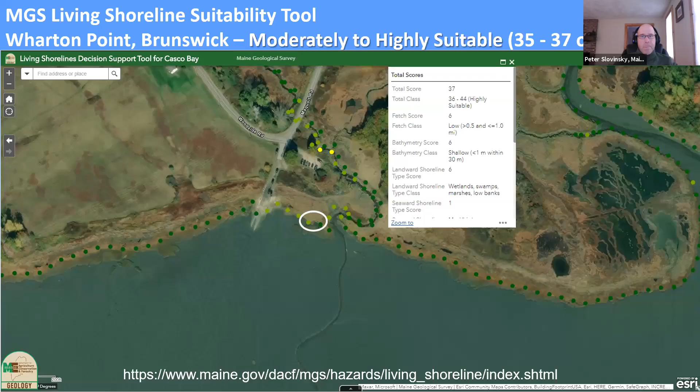So I mentioned our MGS Living Shoreline Suitability tool. This is a tool that we've developed for Casco Bay only at this point, which looks at a variety of different factors that influence whether a site is suitable or not for a potential living shoreline project. And we basically scored all of these; every 150 feet, there's a point. You can see these points all along the coastline here. And those points are a summation of a variety of different characteristics that we assign weighted scores to. So our highest score is highly suitable with a range of 36 to 44.

So Wharton Point came in at moderately to highly suitable with scores of 35 to 37 along the project site out of 44. This is what the site actually looks like. It's a small 50-foot segment of a larger eroding coastal wetland. There is a log that's washed into the marsh. I'll explain to you why we chose to have this where the log is. So we're only looking at about a 50-foot treatment on a relatively large marsh edge.

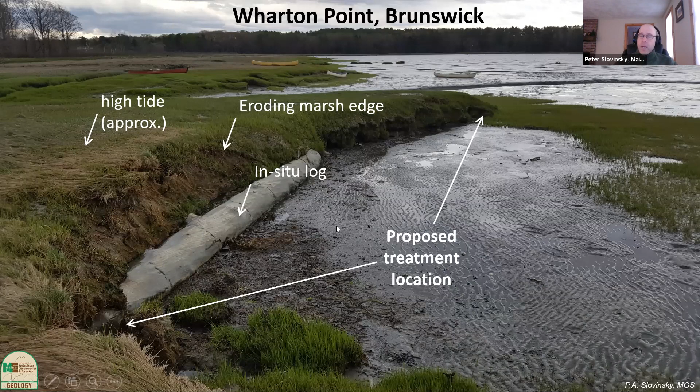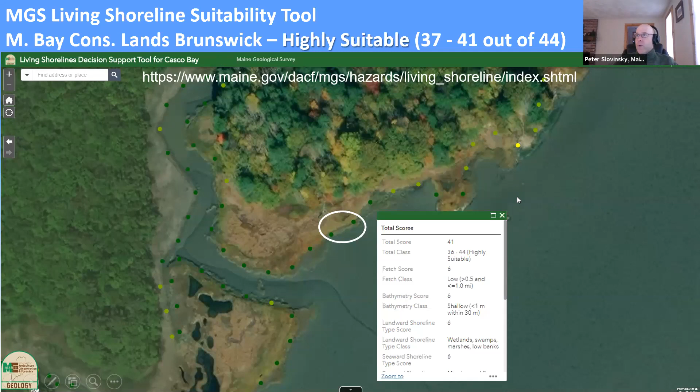Our second site, Maquoit Bay Conservation Lands in Brunswick, scored highly suitable with a score of 37 to 41 out of 44. So it's in that higher range even than Wharton Point. It is on the end of about a 20-minute hike or a quick airboat ride from Wharton Point. And this is what that site looks like. Again, we had an eroding marsh edge. You can see these slump blocks that have slumped down, which is representative of a lot of fringe marshes in Casco Bay, and a 50-foot section along a much larger stretch of eroding salt marsh.

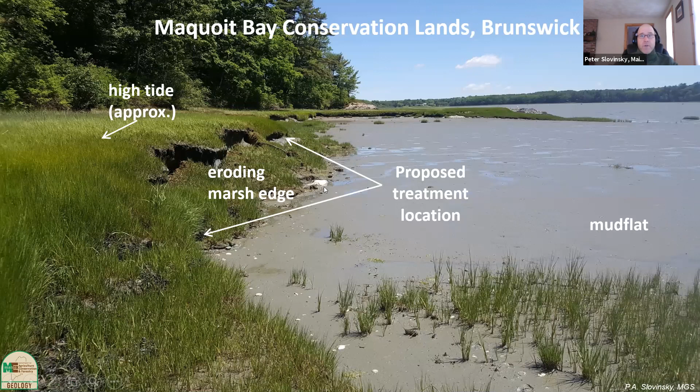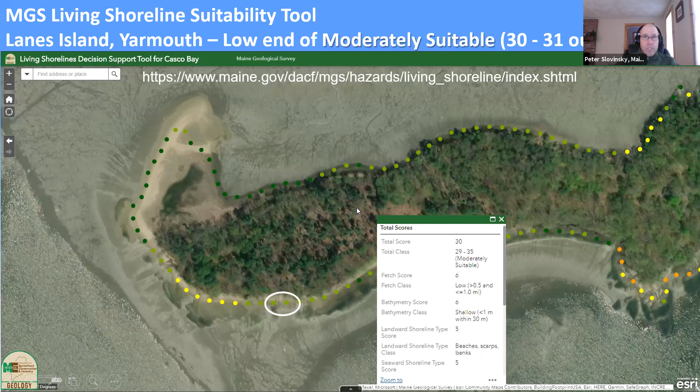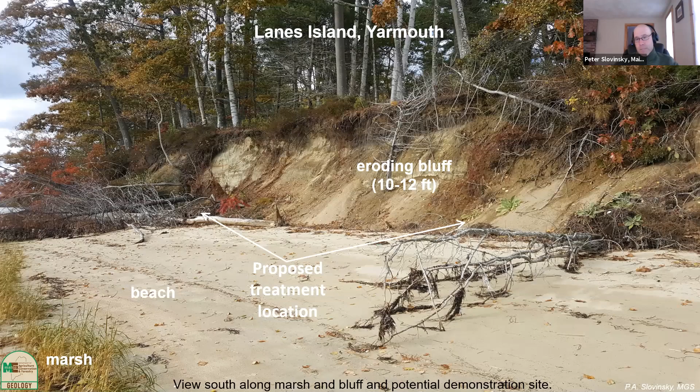But this is a test site we wanted to test for a coastal bluff. It's owned by a project partner. And it's on the low end of that moderately suitable scale. This is kind of what it looks like. There's a long stretch of eroding coastal bluff, about 10 to 12 feet in height, and lots of down trees. So we had trees on site that we wanted to use.

Fill it with oyster shell and put it out to create a little kind of sill or a little breakwater at the edge of a marsh to help break up waves or slow down erosion. This is something that immediately raised concerns with the regulatory community because these plastics break down very, very quickly. These bags tear very quickly, and then these plastics become smaller pieces of plastics in our marine environment. So that's something we had to address right away. We couldn't just go out and throw these bags out there.

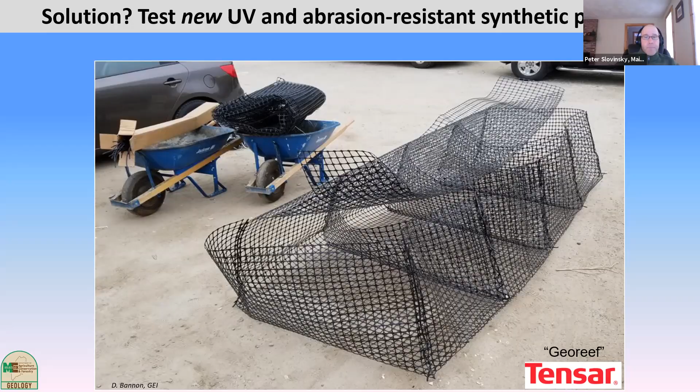So one of our challenges was COVID, of course, hit. And we had to come up with a way to socially distance, but also fill close to 400 bags with oyster shell.

So we came up with a bagging system at Brunswick Public Works with a bunch of volunteers, where we built these bagging stations. A little tiny tractor was used to put oyster shell into these. You could sort out dirt and stuff off the top of this, fill each tube, and then there's a bag underneath. And then we set up sewing stations, and everybody had their own station, and we sewed these bags by hand. It took a lot of time, but we did 400 bags in about 3.5 days.

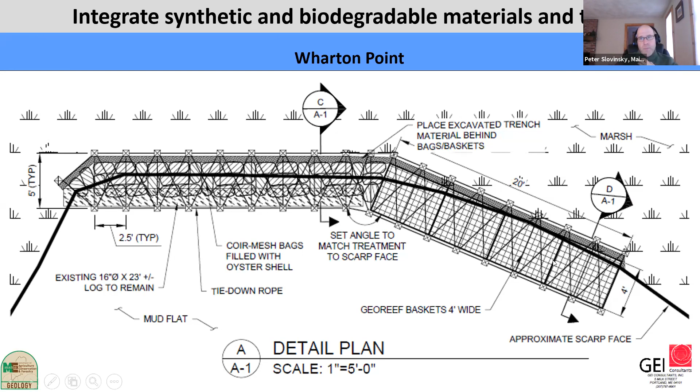So again, our goals are to look at these synthetic and biodegradable mixes on small treatments. So this is our design that our engineer at GEI came up with for Wharton Point. On the left-hand side is where that log is located. This would be where the textile bags that are filled with oyster shell would be placed and staked. And to the right of that is where the georeefs would be placed and filled with oyster shell.

For the Maquoit Bay Conservation Land Site, we didn't have any logs there, but we had trees that we brought into the site. And what we wanted to do, again, was test a synthetic, this is on your left-hand side, the georeefs, versus a biodegradable product, but we integrated what we call tree runners. These are 10 to 12 foot logs that we put perpendicular to the shoreline that are meant to break up ice as those ice rafts come in towards the installation.

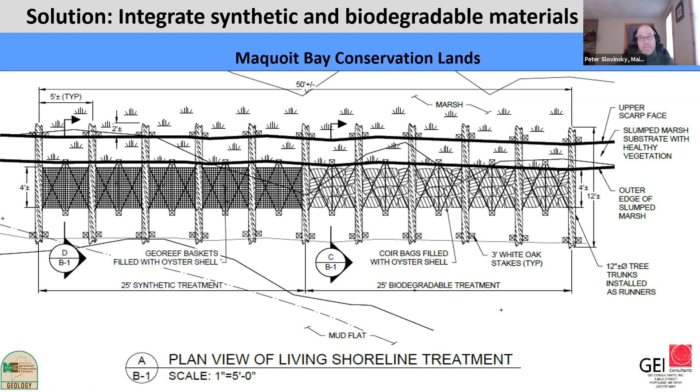So this is what it looked like when we were integrating the trees into Wharton Point and Maquoit Bay Conservation Lands. On the left is Wharton Point, and the right is MBCL. At MBCL, we had to float these logs in at high tide, lash them at the top, and then let them fall, and then lash them in at the bottom. And all this was done with volunteers at both sites.

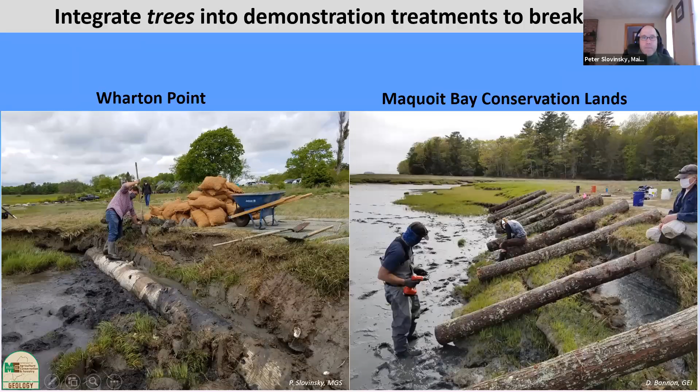One of the challenges we encountered, this was an interesting one, was what I'll call a, quote, dirty oyster shell. We actually didn't have enough oyster shell in Maine at the time. We don't have a recycling program in Maine. We do now. But we needed a lot of oyster shell, about 40 cubic yards. So we worked with the University of New Hampshire to get oyster shell from one of their facilities where they have aged oyster shell. They have a recycling program where restaurants literally donate their shell, and then that shell is aged for a period of time, in this case, about 3 years, on an organic farm.

So this is what that shell looked like. What was interesting was this shell was brought to Wharton Point. It was actually aged at the town of Brunswick for another year. And then we brought it to Wharton Point and dumped it. The shellfishermen started just digging around in there, and they saw organics, they saw plastic forks. So immediately this created kind of like this red flag of, you're going to be putting that into our Maquoit Bay. So we had to come up with a solution on the fly to deal with that problem. And this is something that other folks who might be looking to use shell might encounter and have to come up with a solution for.

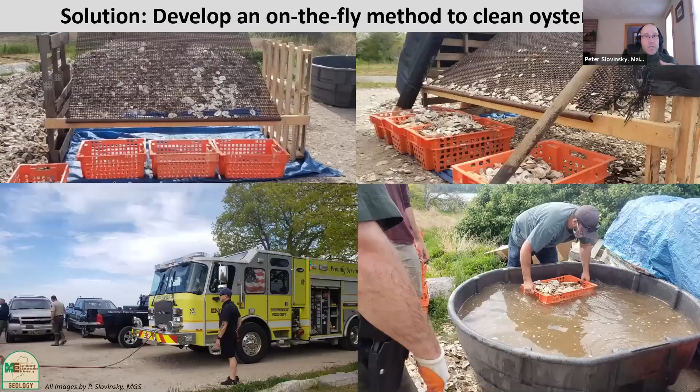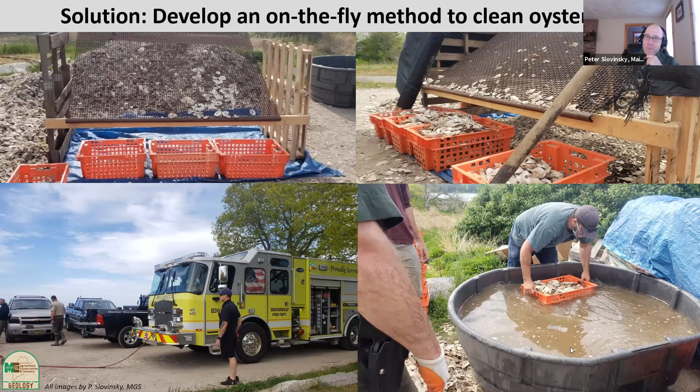So working with Brunswick and IFNW, we developed this screening system on site where you dump the shell through the screen, get out all the bad stuff underneath, pick out all the plastic, and it goes into these baskets. The fire department came, filled up a big tub, and then we dipped each one to rinse it off. Okay, so that's how we created clean shell on site.

Another challenge was doing all this work with volunteers while trying to work around tides. So we had to bring in logs at high tide. A volunteer gentleman from Smith Boatyard actually donated his barge and brought the logs over by barge at high tide. We put them in place at high tide. And then we worked with the town of Brunswick's airboat to be able to shuttle materials back and forth to the MBCL site throughout all the tides, so we could actually work during low tide. Otherwise, we'd have to be hiking 20 minutes on a trail with all this stuff. It just wouldn't have made sense. So this is what the installations kind of look like.

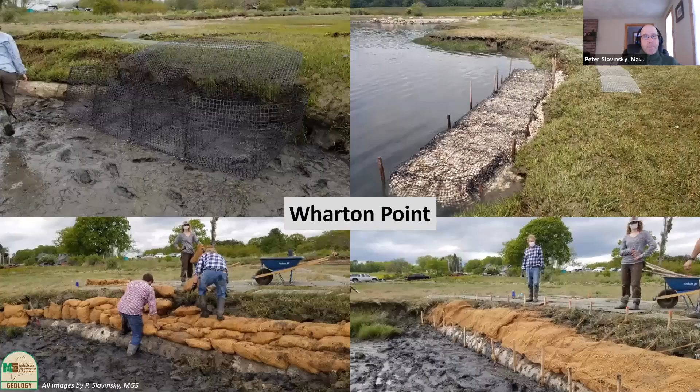We assembled the georeef, filled it with shell, and staked it in place. It creates this beautiful rectangular reef-like material. It's highly, highly resistant. It actually will tear up your hands if you're not wearing gloves. And this is the placement of the biodegradable bags at the Wharton Point site, and they're staked in place and covered with some coir fabric.

At Maquoit Bay Conservation Lands, again, we floated the logs in at high tide and lashed them at the top. Then we put the georeefs underneath. They do not want to be in a trapezoidal shape or a triangular shape. They want to be in that rectangular shape. That was very hard to do. We filled it with shell and then put the bags in place as well.

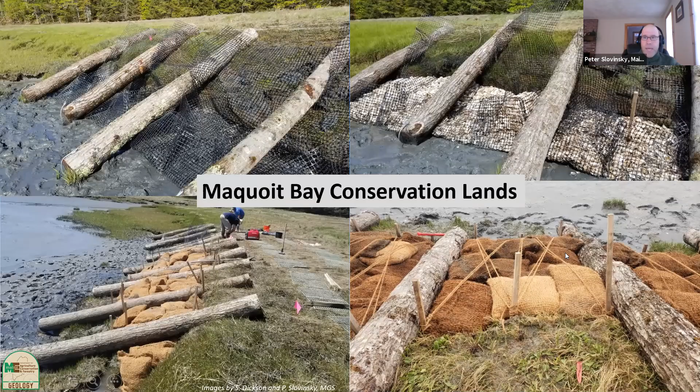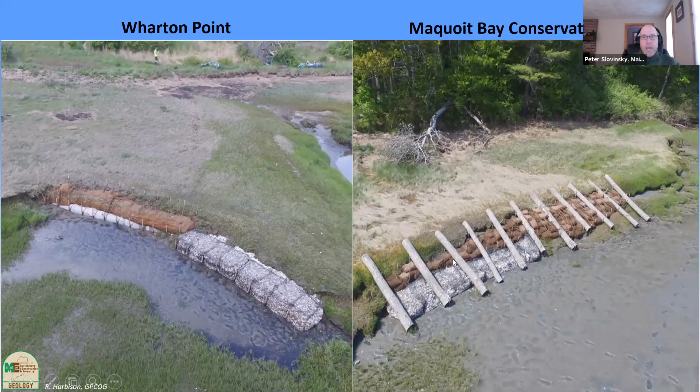We wanted to see if we could slow down that erosion, but still allow for sediment to go out to the intertidal zone. Working on an island is not an inexpensive proposition, and you can't necessarily do it with volunteers. We had to hire contractors to do this work. The installation here was very different. We call this a stepped crib approach.

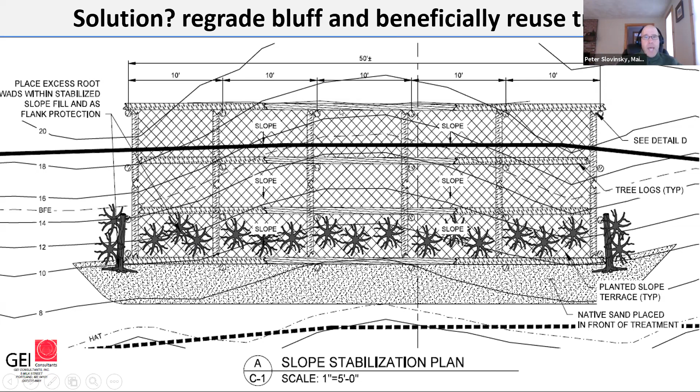So basically, fallen trees were beneficially reused to create 1, 2, 3 steps, and then root balls, the ends of the cut trees, were put in that first step along with on the sides to help mitigate for end effect erosion. And then all the material from regrading the bluff was placed in these steps and in front.

This is kind of what this looks like from a plan view. You can see each step created is then planted with native vegetation, less salt tolerant as you go up the slope. And then excess material is placed at the toe to create sacrificial material, and then in each step. The idea is if a step fails, that material will then be released to the intertidal zone.

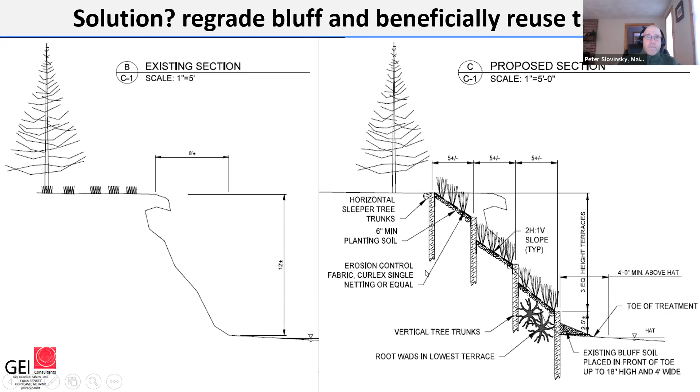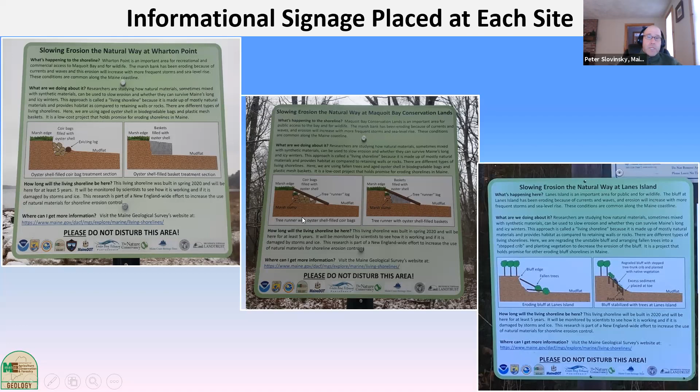Informational signs were placed at each site. I created these using PowerPoint, and Coastal Program worked with a supplier to create these beautiful signs. I think they're really nice signs, summarizing what's going on at the site. So if people see these installations, they have a little bit more explanation and where they can go to get more information. So how have these fared?

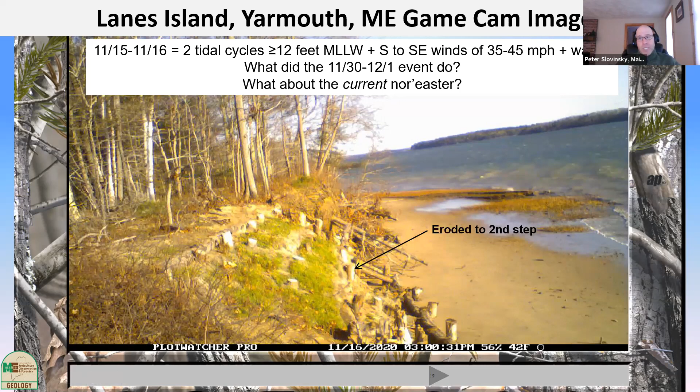And then let's fast forward to November 16th. We had a super big southeaster event. Remember, this site faces due south. 35 to 45 mile winds, waves, and 2 tidal cycles greater than 12 feet. It eroded all the way back to the second step and is undermining the second step at this point. I don't know what the southeaster that happened at the end of November did, and what about the current nor'easter we're having right now with high water levels. So this site is proving to be very challenging.

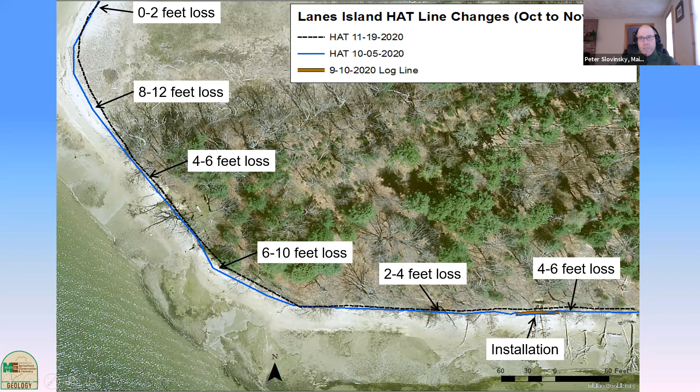Just to give you an idea of the changes that are occurring at this site, we did a survey of the highest astronomical tide line. Basically, it's at the edge of the bluff and at the edge of the coastal dune on this section of Lane's Island in October and then November post-storm. And this is the loss that has occurred: 8 to 12 feet, 6 to 10 feet, 2 to 4 feet, and 4 to 6 feet in the vicinity of the installation. So very, very dynamic.

So to summarize Lane's Island, we've been unable to visit the site since mid-November, so we don't know what's happened since then. But these are some images giving you an idea of what's happened to the site. So we've had loss of sediment and plantings in the first step. We've lost our game camera tree. It literally fell down off the bluff. So our change rate is actually exceeding the planned monitoring that we had in place.

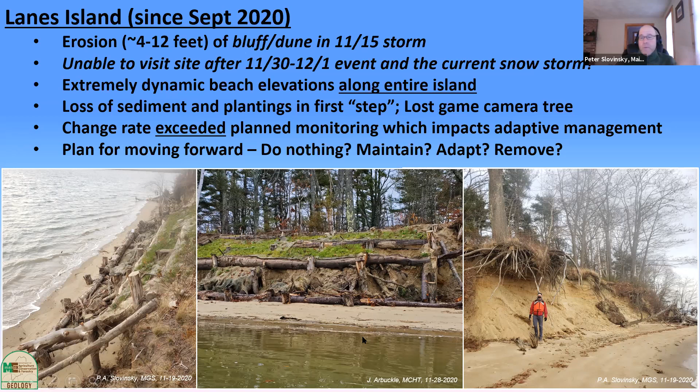So moving forward, we have to decide, what do we do here? Do we do nothing? Do we just keep monitoring and see what happens? Do we maintain it to its original design? Do we adapt this design somehow? Or do we remove it? All stuff we'll have to figure out.

My final couple slides, some initial lessons learned from these. There were no biodegradable options for something that would survive Maine winters. We may have found that, but we don't know yet because we're just getting into winter with the bags. The things we did with bags and georeefs, volunteer labor could easily be used for that. Something like Lane's Island needs heavy equipment. You don't want volunteers doing something like that. Our project team had to be very adaptable to deal with COVID, to deal with tides, to deal with cleaning shell, and then finding funding for and constructing Lane's Island was a challenge.

Messaging is key to avoid project challenges with stakeholders. For instance, if we had slightly different messaging with shell fishermen who were informed of these projects throughout the months that these projects were being developed, maybe we would have been able to quell the dirty oyster shell issue in the beginning instead of having to adapt on the fly. So when you're building these things and designing them, you need to be adaptable. These next 3 points, I think, go to Lane's Island. We had a lack of historical shoreline change information at Lane's Island. That probably influenced the siting of the treatment.

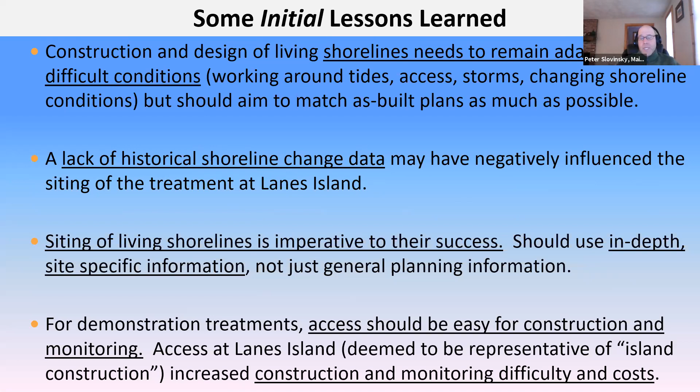So I think siting of these things is imperative to their success. So my low to moderately acceptable ranking in the MGS tool might not necessarily be appropriate for a site like Lane's Island. So we have to use in-depth site-specific information when we make these decisions. We also learned that when you're building a demonstration treatment, make access easy. Don't choose something that's really hard to get to. It just makes things more difficult and more expensive.

Our monitoring frequency, especially at something like Lane's Island, was not geared towards something so dynamic. We were going to be visiting it spring, summer, and fall, and maybe once after a storm. It's like we have to be out there almost every 2 weeks based on what's going on. Scale is important. Remember, these are small 50-foot treatments, and they may not be appropriate for determining the efficacy along really long lengths of shoreline.

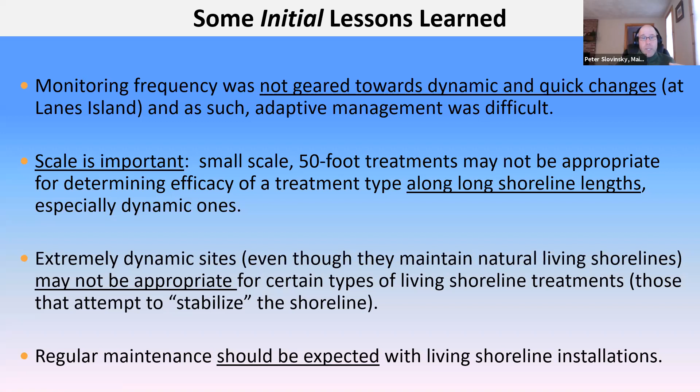Dynamic sites like Lane's Island might not be the best sites for living shoreline treatments that attempt to stabilize the shoreline. It might make sense to have something that breaks up some wave energy and maintains like a natural beach or a natural coastal wetland. And regular maintenance needs to be expected with these things.

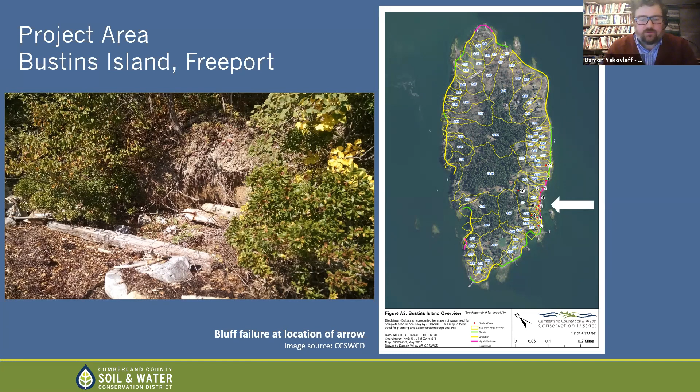Pooled water is observed, so there's lack of infiltration, things like cloudy polluted seawater. So indications of accelerated erosion have been noted. So the approach, the overarching goal within the case study area, is to hold and slow the stormwater runoff in the southeast subbasins of the island. For part of our analysis, we divided the island up into various subbasins using a computer model. So that's what these yellow lines indicate.

And just some basic background about the water cycle and some of the terms we're using here. Our focus is really on runoff. So as precipitation comes down, it hits the land and then it goes downhill. Some of it will infiltrate and some of it will sheet right off into the surface waters at a high rate of speed. And that's especially true along hardened surfaces like roads, roofs, and other types of developments.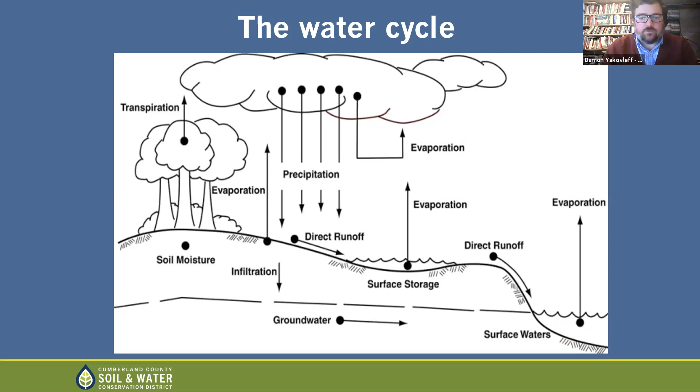So some of the potential for solutions here, you can see on this map, it shows the sub-basins we've generated in the computer model. And our real focus here is this road that runs down in this direction toward the village library and post office. There's a playground here. So it's a pretty important public area, and we're really looking at some of the solutions in this general area. For more details about that, I'm going to turn it over to District Engineer Chris Baldwin. Take it away, Chris.

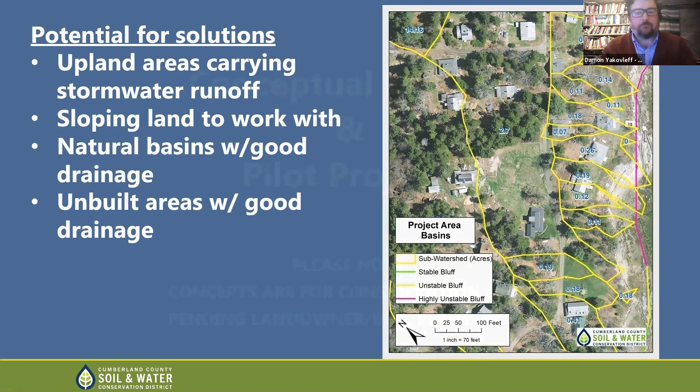Thank you, Damon. Hopefully everyone can hear me okay. Yep. It's a pleasure to be here with you today. I am Chris Baldwin, the District Engineer at the Soil and Water Conservation District. And I have to say, it's been a pleasure to work on this project. Pretty exciting work out there, and it's just been a joy working with Charlotte, who has really spearheaded this whole thing. Hats off to you, Charlotte. No, wait, and our landscape committee, and especially Jim Boyko, who's done a huge amount of the really hard work. I'll get to them, Charlotte. I'll get to them.

But again, thank you. Just working on an island during a pandemic is such a challenge, very difficult in a lot of aspects. A lot of the things that we were trying to do out there are community-driven efforts. They're efforts you want to work with the landowners on. You want to use local materials and labor, low-cost solutions, but you really want to work with the islanders and the landowners. And unfortunately, this pandemic just made that so difficult this summer. So we were able to prepare some concept designs and construct some pilot projects, and I'll discuss those today.

But I did also want to give special thanks to Jim Boyko and Crawford Teasley, two gentlemen from the island that were just instrumental in making some of these pilot projects happen. So next.

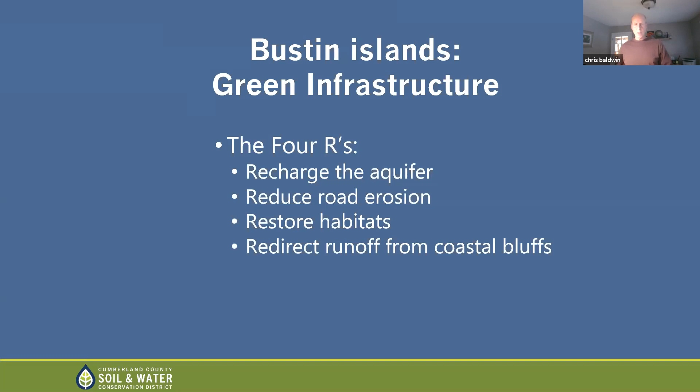So we chose 3 areas to study, and we chose these areas because they all end up distributing runoff down to that subbasin, that southern subbasin, and the bluff down there. So we're looking at the 3 areas here that seem to put off the most water, and we're looking to slow it or capture that storm water before it has a chance to concentrate and get all the way down there. We did choose these sites also because they're public land, or else they were willing landowners right from the beginning that wanted to work on this project with us.

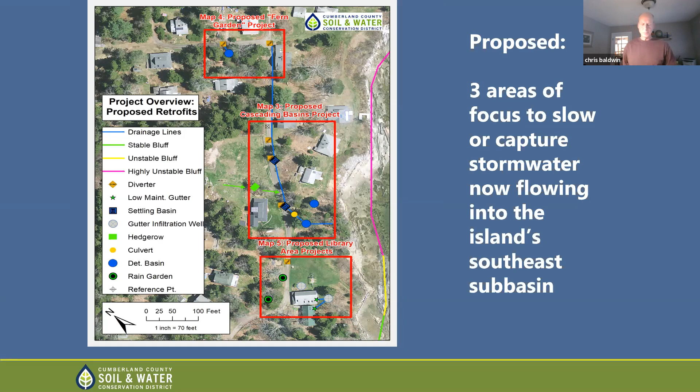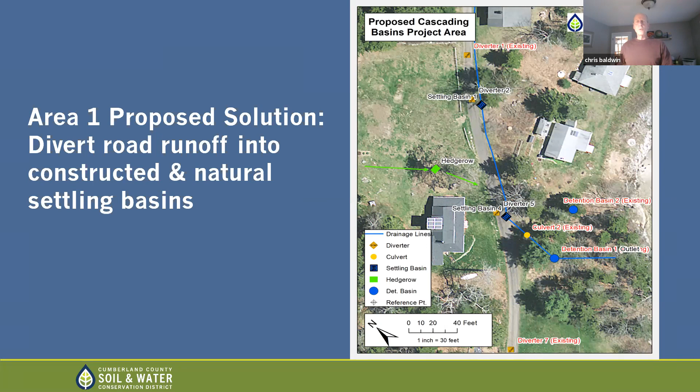So area 1 is the main road, gravel road, this rather steep hill that comes down all the way to the bottom of the hill where there's a playground that's almost always saturated. The public buildings, the post office, the museum, library are down that way. And then all that runoff continues on down to the bluff. So we chose next to divert the water off of this road, and we use very simple diverters to do this. Simple berms across the road to cut off that concentrated flow and direct it into settling basins.

We have to note here that we are on an island with very minimal vehicle traffic, and nobody's out there in the winter, so there's no plowing. So this type of best management practice actually has a life out there of several years, rather than if you're trying to do it someplace where there's a plow truck or a lot of vehicle traffic. Next.

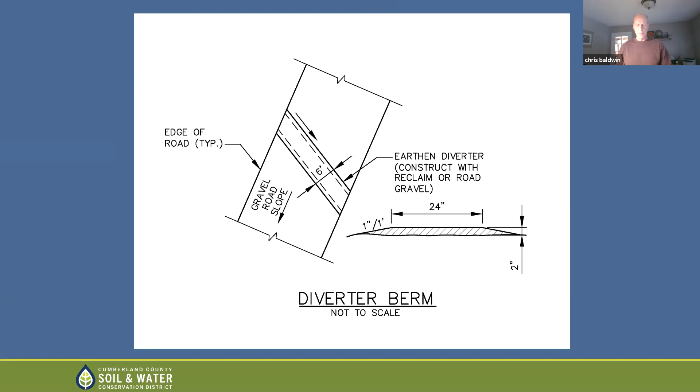So the idea would be that the water would hit that diverter berm and then run off into one of these settling basins; this is our first pilot project. And the settling basin viewed here was right after a storm event, so you can see how well it collected that runoff off the road. It's rather cloudy, so there's some sedimentation taking place there, and a lot of that water will infiltrate in. As you can see here, the water actually exits that basin when it becomes too full into a riprap channel that's used to convey that water down the slope. Next.

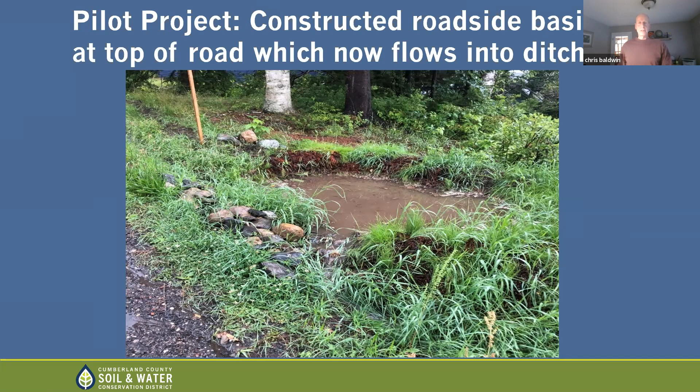With the concept plan being a series of these diverters and settling basins along the edge of the road, so that you're continually pulling off that water in smaller and smaller increments, more manageable quantities, and controlling it as you move it down the road, thereby experiencing less road erosion.

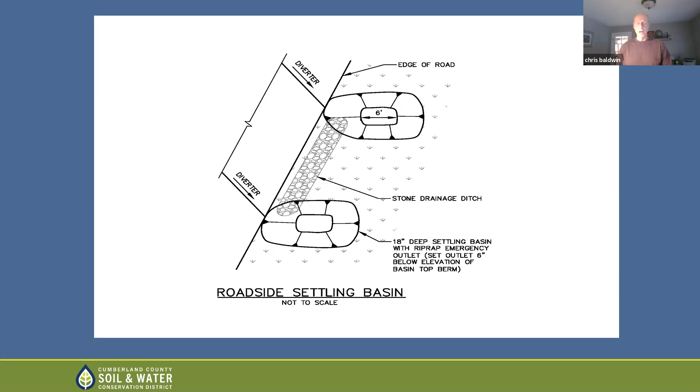And I will note that there's been some concern about the drainage ditch, and the fact that as an engineer, the first thing I want to do is riprap it. But there's some concerns about hazards and a lot of rock around there. So we're looking at other options like turf reinforced mats and things like that, because we do want to build something that the islanders are going to be happy with, and that they feel fits their island. Next.

So part of that pilot project, again, was all the way down at the bottom of these cascading settling basins. Doing just some very minor berm work, we were able to create some detention or settling basins down in the forest area where this water really has an opportunity to settle and lose its energy. We can manage it a little better, and ultimately, during really large events, we can direct it away from that southeast slope that's having the accelerated erosion on it. Again, these were built on both private and public lands. And again, this is the outlet for those cascading sediment basins that come down the main road. Area 2. Oh, excuse me, next.

Second area would be up above the main road. Here, we're just trying to show how with a very simple turnout on a small section of road, we can remove that runoff from the rest of the runoff that ultimately ends up down on that road and further downstream, and just turn it off into some type of roadside feature. In this instance, we're talking about just regenerating the ferns that are there and creating a fern garden, so to speak, to absorb this water and control it again before we turn it back out to the road during large events.

We do have to note that almost every single one of these properties has its own well and its own septic system. A lot of that's been mapped for us, and we've included it into all of our GIS and map systems. But we're always mapping where those things are. You can see where this property has a septic and a well, and we'll be making sure to turn all water away from those systems. Next.

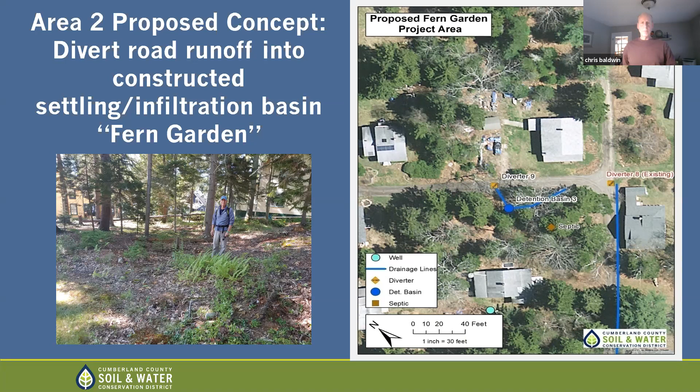And the final area we were looking at is all the way down at the base of the hill. So we're hoping at this point that we've controlled and managed most of the water that's been running down here historically, where we've had a lot of wet area. The playgrounds over there around the buildings have typically been fairly saturated.

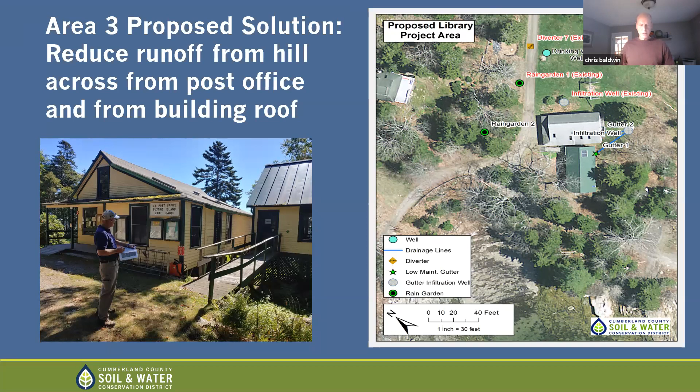So now what we still have is some water coming down the hillside, which would be to the left of the buildings in the photo, and the roof runoff itself from these buildings that have no gutters or anything to control it. Next.

So as a past pilot project, as part of some past work, folks of the island built a rain garden right at the base of this hill to intercept that flow. Does a great job coming down there. The plants are all uptaking that water, and we've got some lovely plants in there to attract butterflies and different things like that. Meanwhile, the soils and the plants all filter out any pollutant or sediment that might be there, and we get clean water soaking into the ground.

And the concept plan here is to build another one of those just a little bit to the left and upstream that will then tie into that. So we start catching more and more areas of the hillside.

And then finally, around the buildings, we're proposing to put in a low maintenance gutter. Low maintenance in the fact that there's not enough time out there to deal with cleaning leaves out of a gutter. So in this instance, we find a gutter with a storage lid on it that will prevent the leaves from getting in, but the water all still collects. The downspouts from the gutter will run into some type of infiltration well or drip lines into a dry well.

We still have to do a little bit of test pitting out there. There's still some work to do this spring to locate a good location to infiltrate that water. But that's just one of the next steps that we hope to take care of in early 2021 when we can get out there again. So those are the three areas we looked at. I'll turn it back over to Damon to talk about some of our next steps.

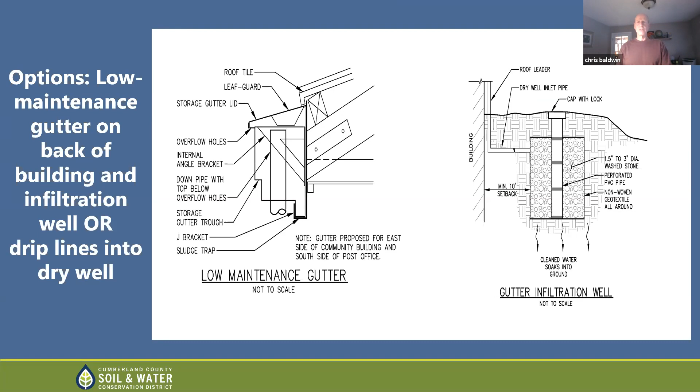Thanks, Chris. So our next steps here are to continue to do site assessments, work with the island community and the landowners to determine what projects they'd like to move forward with, and make adjustments as needed, do some additional study and develop additional designs. The hope is that we'll be out there in the spring and maybe starting to build some of these things, and then assess how they perform and make adjustments as we go.

And a really good resource for this island in particular is there's a really interested community of gardeners who will be able to propagate native plants and make some selections from the Coastal Planting Guide and other resources. Hopefully this has inspired many of you to think about your sites and your communities and local resources and groups. And I encourage you to think broadly and include, say, local garden clubs and others who may help contribute to some of this green infrastructure work.

So with that, we'll take some quick questions before we go to Martha with some information on financial resources. I will stop sharing my screen. Harold, do you want to call on people? I think you can see the participants list better than I can. I see Doug has a question.